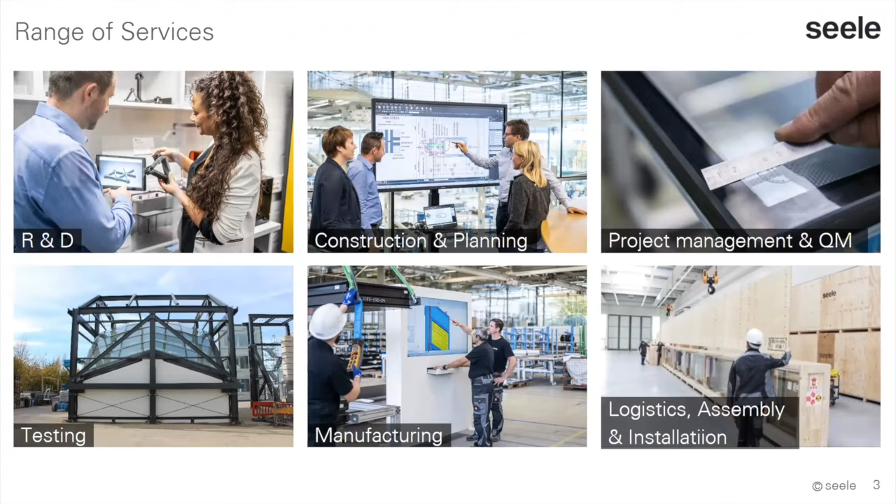So the range of services we provide are majorly research and development, construction and planning, project and quality management, testing, manufacturing, logistics, assembly and installation. Facade technologies we are using are mainly steel and glass constructions, all glass designs, unitized facades and membrane constructions.

Highlight projects here to share with you so you get a little bit of better idea of what kind of projects we are focusing on. To the top left, we have Chadstone, a shopping mall in Melbourne, which is a grid shell glass roof, steel glass roof. Top center, you can see King's Cross in London. On the right-hand side, it is Tech Bridge in Toronto.

On the left middle, it is a store in Bangkok. In the center middle, we have the Strasbourg railway station. On the right-hand side, we have Icon Siam in Bangkok as well. Left-hand bottom, it is King Abdulaziz Center for World Culture in Dhahran. In the center bottom, we have the European Central Bank. And on the right-hand side bottom, we have Canary Wharf in London.

So let's talk a bit about glass as a structural element. In general, we have some different types of glass treatment we always need to have in mind when we do glass construction. Let's have a look at what it is. It is float glass, also known as annealed glass, which is a glass that is practically not treated after the float process besides the cutting and such.

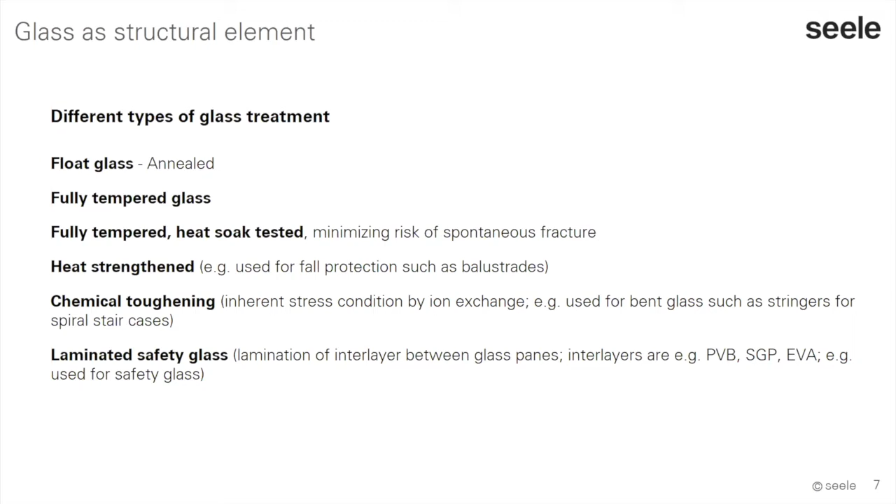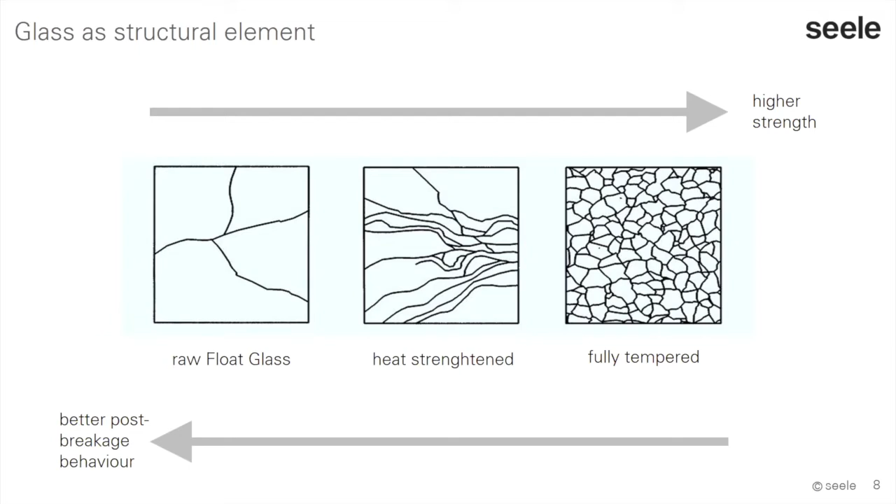And then we have laminated safety glass, where you can laminate all the different glass types as I mentioned above. So to keep in mind, the higher the strength of the glass, the smaller the splinters. The larger the splinters, the better the post-breakage behavior in a laminated glass buildup. This is something we always need to keep in mind when we have a deeper look into the following projects.

So let's start now with the rooftop viewing platform and glass cylinder on the Mahanakhon project in Bangkok. It is the Mahanakhon project, you all know it, it's the highest building in Bangkok. There is a sky tray on top with approximately 60 square meters glazed floor, which cantilevers out of the building. Then we have here 6 glass panels, each 4 meter by 2.17 m, mounted on the primary structure of that frame. Then we have a glass cylinder consisting of an inner and an outer cylinder with 600 square meters of bent glass.

Let's start here with the glass observation platform. As I mentioned, it's 60 square meters. This is what we received in the beginning. We had this visualization here. On the left-hand side, you can see the cylinder again. On the right-hand side, you can see the glass platform.

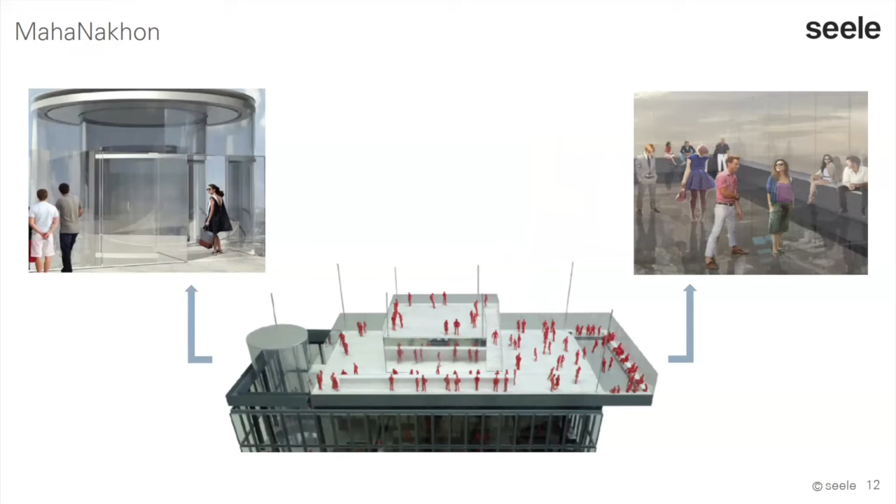So the first discussions we had, there was a design with a steel member below the glass on the joints of the glass. So we were asked whether we could substitute that steel member here with a glass member to make it more transparent. So our idea was that maybe we could even do it without any support below the glass, just making the glass itself strong enough to withstand the live loads there on the roof.

We have to keep in mind here, it's a multi-laminated glass, and with increasing temperature, the structural strength of this glass is decreasing. So how do we determine the structural behavior of that SGP laminated glass panel over temperature?

Besides the outer temperature you have in Bangkok, it's also the direct sun impact that needs to be considered. The direct sun impact leads to effects like transmission, reflection, absorption, and in the end, how much of the sun energy is absorbed by the glass. So how much does the glass heat up by that?

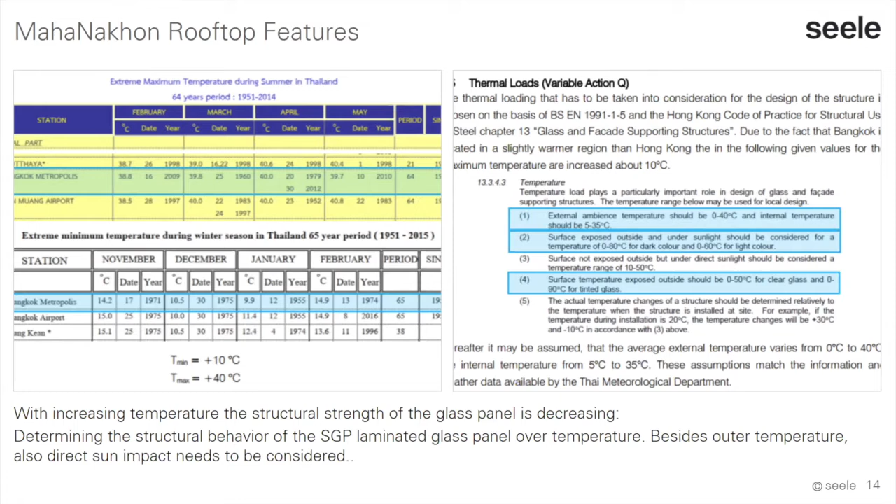In absence of any European or Thai code, we used the Hong Kong code of practice to determine the heat gain due to direct sun impact, always in close consultation with local structural engineers and local authorities.

After all of that was clarified and the calculations were done, we started the practical testing of the glasses we had calculated structurally.

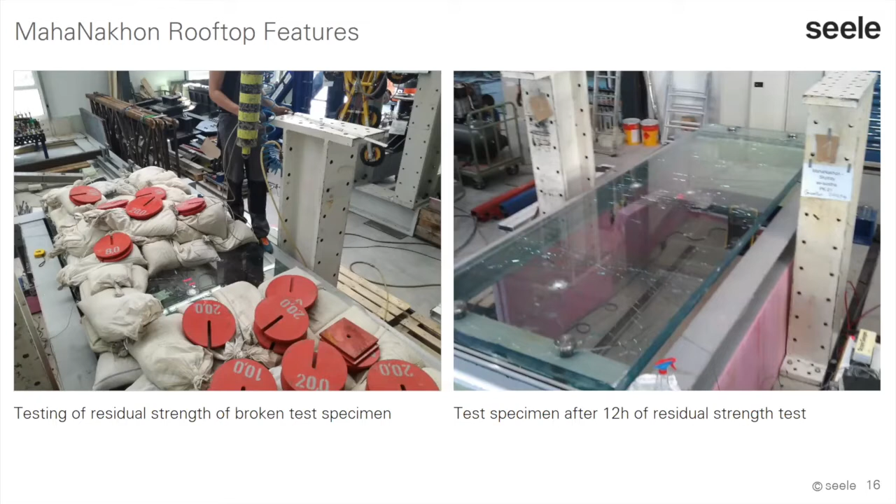We did a permanent loading test. We did the hard body impact testing after the glass broke. With the hard body impact testing, we did a residual strength test of the broken specimen. On the right-hand side, you see the test specimen after 12 hours of the residual strength test.

It's a special point fixing technology which fixes the glass in the bracketry, in order to avoid that in case of a complete glass failure or breakage, the glass could slip out of its bracket and fall down with all the people on it. So this would not happen.

So even if you have a complete failure of the glass, with the glass full of people standing there, it would not slip out or fall down. It's absolutely safe. It would just sag down 2-3 centimeters and then stop, and that's it. All the people can leave the roof safely.

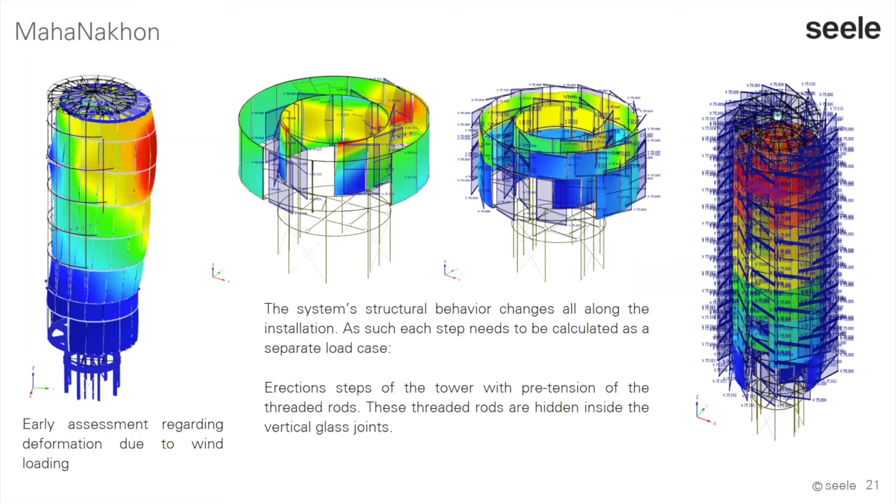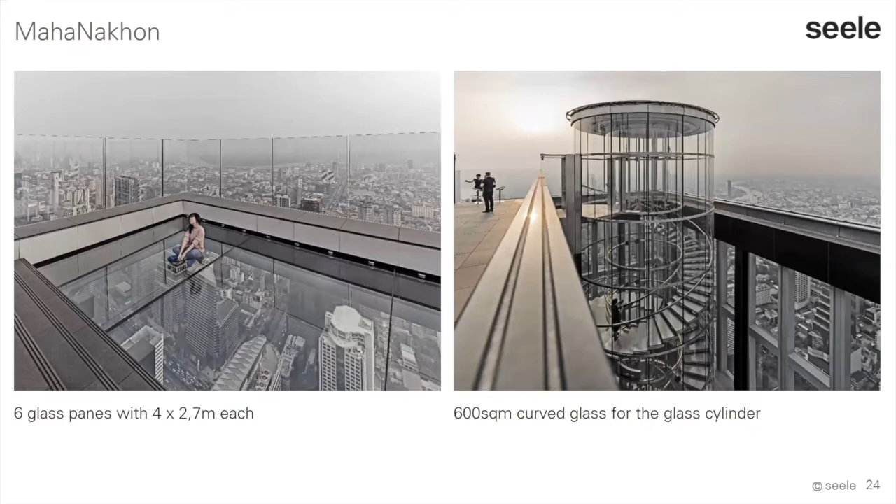So this is the Maha Nakhon rooftop features. Now let's have a quick look at another staircase we did in Bangkok, a staircase over 3 floors at the True Digital Park.

Here you have a view of it after it was finished. Again, we have a central glass cylinder here, and an outer spiral staircase going around, but in this case we have no outer cylinder around it. We have only an outer stringer, a glass stringer, and that glass stringer is suspended from the ceiling.

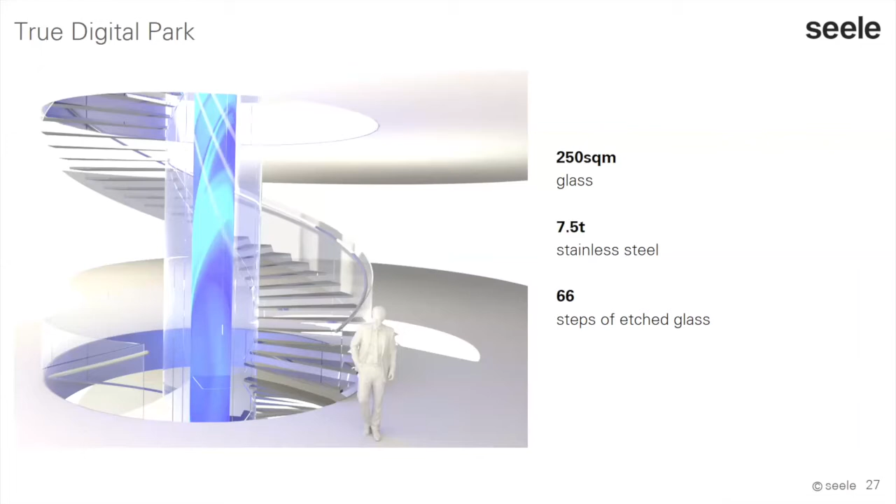So here you have the original architectural concept of it: 250 square meters of glass, 7.5 tons of stainless steel in the construction, and 66 steps of etched glass. The structural calculations here show the deformation of the structure under wind load applied in the X direction.

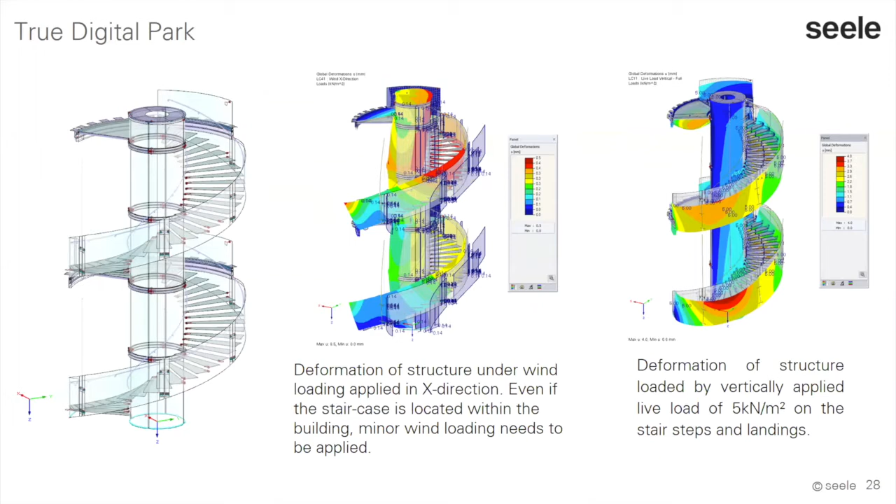Even though it's an inside staircase, you still have to apply internal wind load, which is what we did here, and you can see the result on the glass structure. Then we did the visualizations.

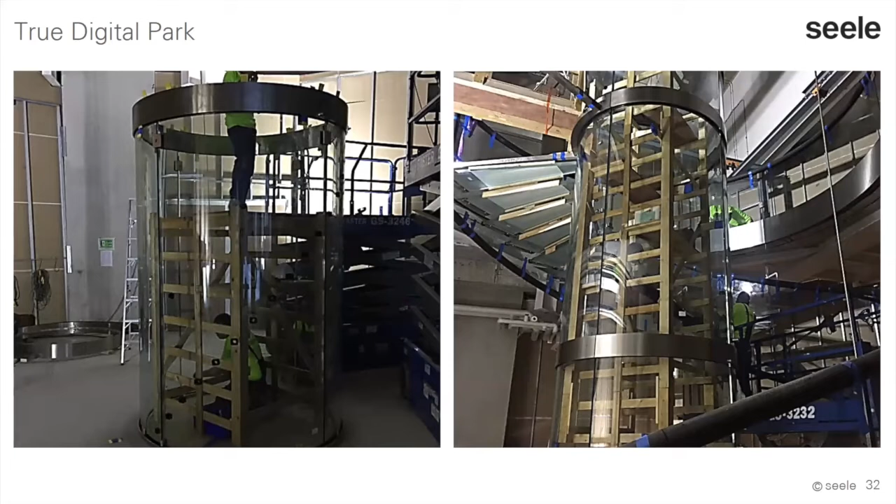And then we come up with the inner cylinder, again with a wooden scaffold inside. Just after we reached the upper floor, we had a glass breakage with the lowest glass in the cylinder. That happens in our business, so we had to change that cylinder. It's also very important that the design ensures glasses can be changed in case of breakage.

Sometimes this is a little bit in conflict with the architectural idea. Here you can see the stainless steel ring above the glass that was broken. The architect's idea is to keep the stainless steel ring as small as possible. We want that too, but we also have to consider the exchange of the glass. So it gets sometimes a bit bigger than the architect originally wanted, but it's still better to have a bigger stainless steel ring here than the alternative.

The alternative would be that you have to build down the whole staircase from top to bottom just to change one glass. That would be the result if you made a smaller stainless steel ring here. So you have to consider all of that while you design it, and that's the final result. Here you see the stainless steel rings and their size, determined by the option of changing glasses in case of breakage without deinstalling the whole central cylinder.

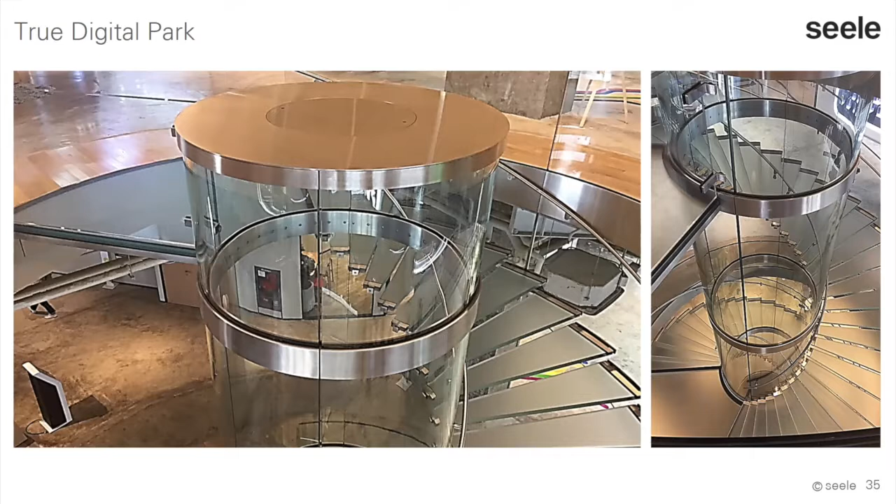So in my humble opinion, this is one of the most exciting staircases we've ever done. Very, very beautiful, in the True Digital Park in Bangkok.

The glass panels are inclined in two directions, to the outside and to the side. The front glasses are in between glass fins and also inclined. We have 333 glass fins, up to 8-fold laminated, and 333 glass front panels with a length of up to 16 meters.

Let's have a look at it. This purple one here is the facade we're talking about now.

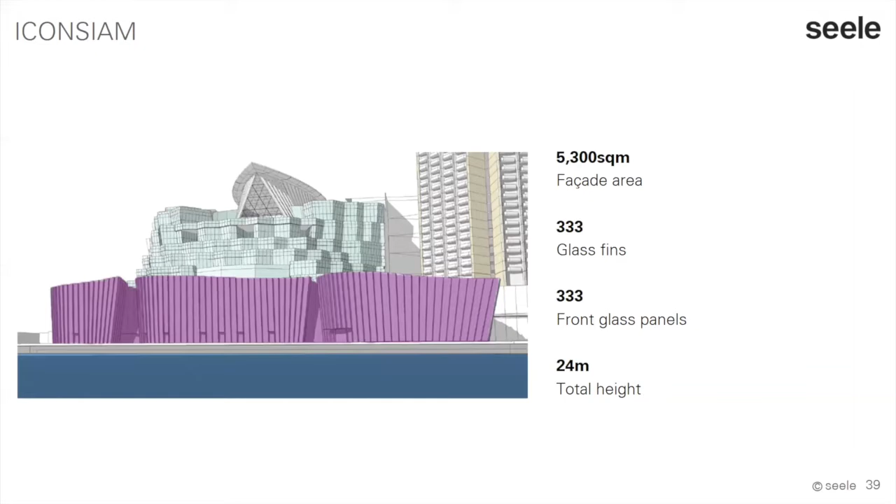This is a picture I first received from Bangkok with the question, can you do it? So I looked at it and thought, let's say yes, maybe. I wrote back, yes, maybe. Two days later I was in Bangkok discussing the project with the client, and a long story started—a real success story with that project. It's one of the most amazing projects.

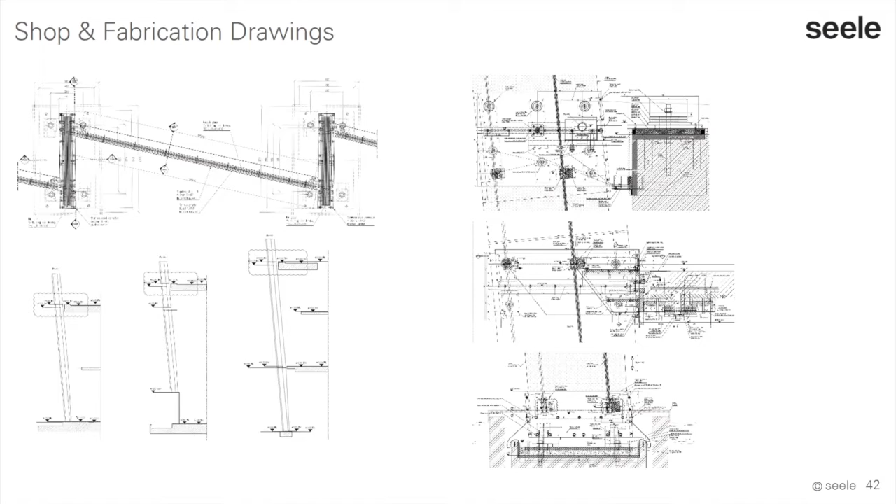Since we have this curved plan of the whole facade, you can imagine an irregularly curved layout, and zero repetition in all the detailing. So for all of the 333 fins, we have a different detail with this complexity, as you see on that picture. Now we go to our glass fabrication.

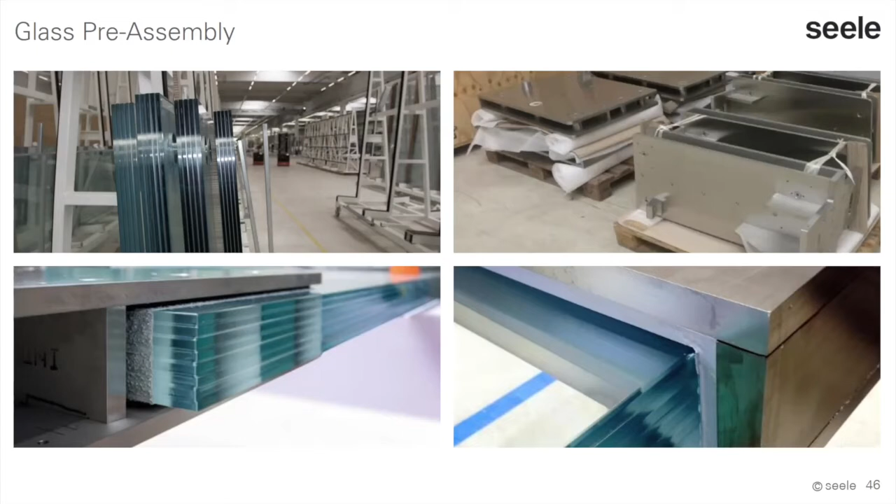The stainless steel shoes come from our in-house steel workshop in the Czech Republic, Seele Pilsen. Then the glass is produced in-house by sedak. The steel shoes are sent to sedak, and within the factory we are fixing them to the glass fins, and this is then how they are shipped.

So here you see them after the pre-assembly, after the stainless steel shoes are fixed to those fins. Then we go into the packing. Here we do our wooden crates for it, and then the fins are loaded into the crates.

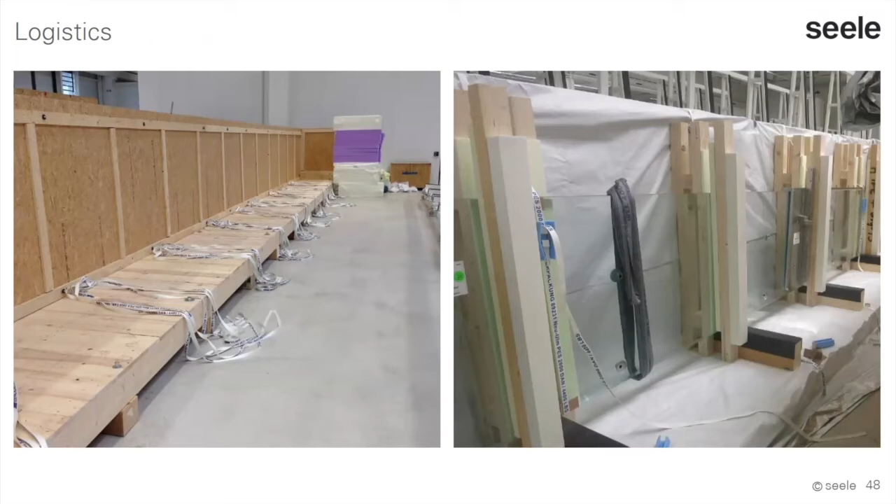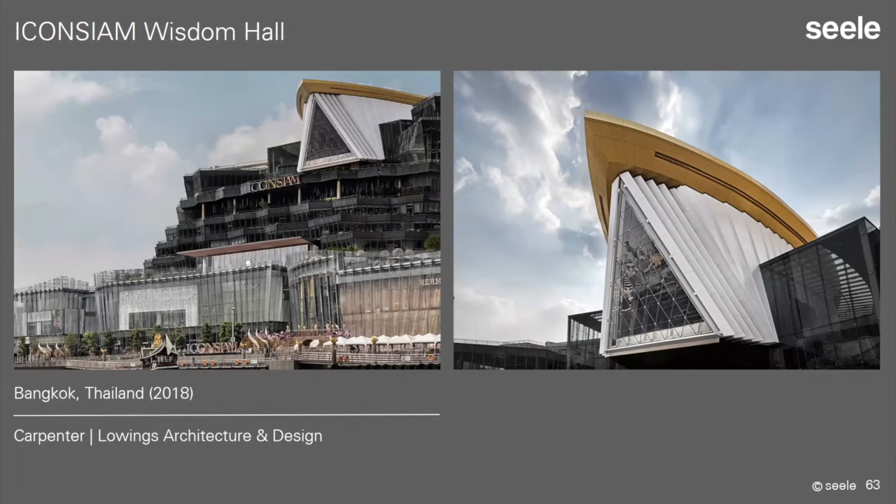So here what we did is an 80-ton structural steelwork. That is the triangular steel frame you can see, consisting of 64 triangular panels of glass held by 14 tensioned steel cables, stainless steel cables, connected at 21 nodes in between.

So we were very limited in lifting material up to the roof - there we could maximum lift 3.5 tons. So to assemble this massive 80-ton heavy steel frame, we had to bring it up in chunks. First, we had to build up a massive scaffold and a working platform on top of the scaffold. Then we were fixing huge hinges against the construction.

And at the tip of the triangle, there is then one single bolt to fix the whole triangle in its final position when it's upright. And we want to see that now here.

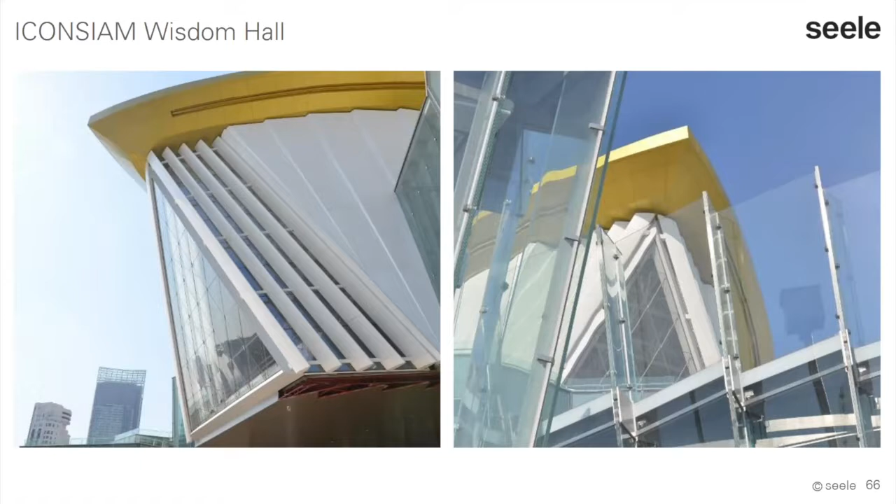That's the final result of the Wisdom Hall, including the glazed cable facade now. And here you see it from inside. You can also see the point fixings that are holding the triangular glasses are pretty small.

So this is now something that Seele is very well known for, that we are able to minimize all structural elements in such facades. And in order to be able to do so, you really need to know about glass - you know how it behaves, and you know how you can use it in its best efficiency structurally.

Another glass facade we did in Asia, that one in Hong Kong. Let's have a quick look into that. That is the K11 Musea.

It's the design, production and assembly of a 2,300 square meter glass tube facade. It consists of laminated safety glass tubes, 69 of those with CCF technology, which is closed cavity facade technology, with stainless steel cladding at the ends of the tubes. We have totally 307 of those glass tubes, and 69 with the CCF technology.

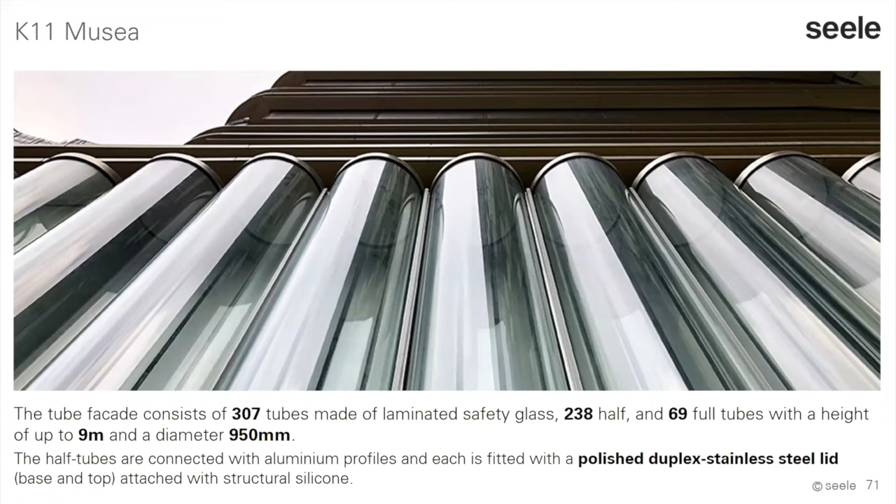So for this facade, we have tubes up to 9 meters high and 950 millimeter diameter. The half tubes are connected with aluminum profiles, and each is fitted with a polished duplex stainless steel lid at the base and top, sealed with structural silicone there.

For the fully closed tubes, we use this closed cavity facade technology, where we pump in dry and cleaned air. It needs to be clean, of course, so there's no dirt inside those tubes, because you don't want to go inside to clean it. Secondly, you need to make sure there's no condensation inside the tubes. And the risk of breakage of the tubes must be absolutely avoided, since they are quite expensive. The damage of a sealing of the tube also needs to be avoided.

So we have to make sure the fixing to the building is created in a way that it can take all the movements of the building, especially all the lateral movements. That led to a very complex top and bottom detail, to make it movable and flexible enough to go along with the building's movements.

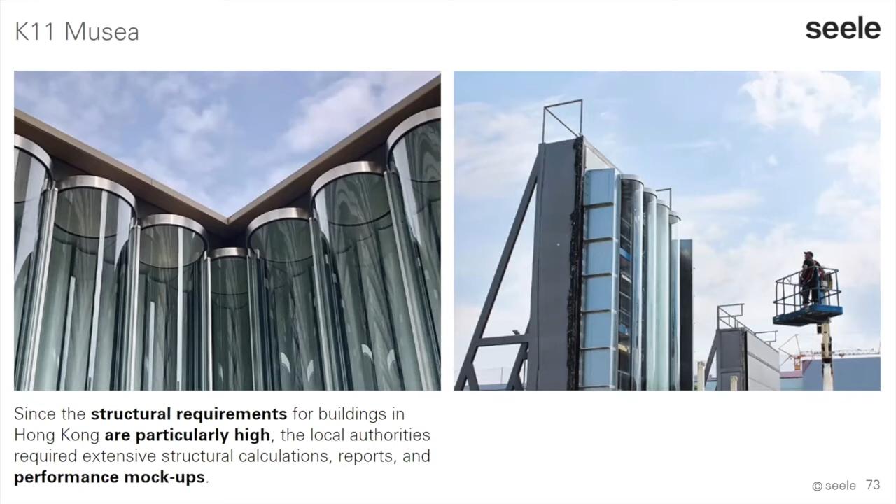Since the structural requirements for buildings in Hong Kong are particularly high, the local authorities also required extensive testing and structural calculations, which we did in Gersthofen, our headquarters in Germany. Here you see the test build-up.

So thank you for that. Now let's have a quick look into the installation of the ICONSIAM, or the making of ICONSIAM. I have a short film prepared, so I will run it now.

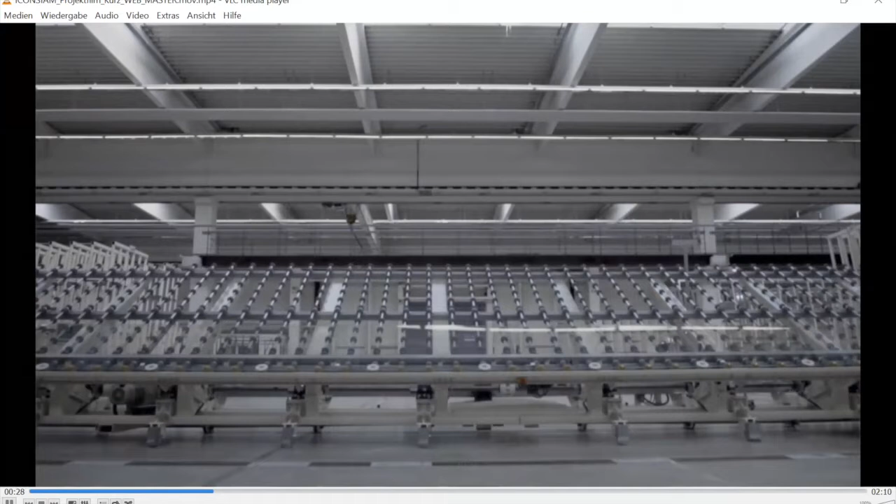The glass processing, engineering of the steel brackets. Here you see one of the brackets, it's massive. The fixing of the stainless steel shoes.

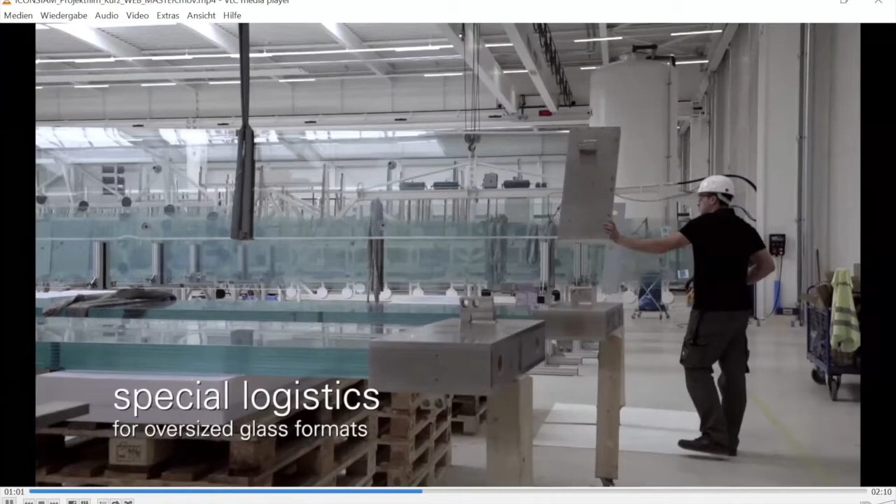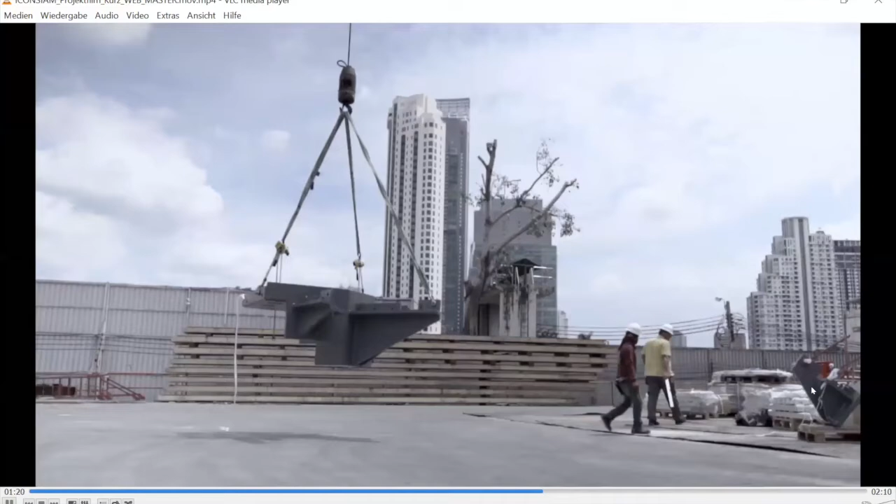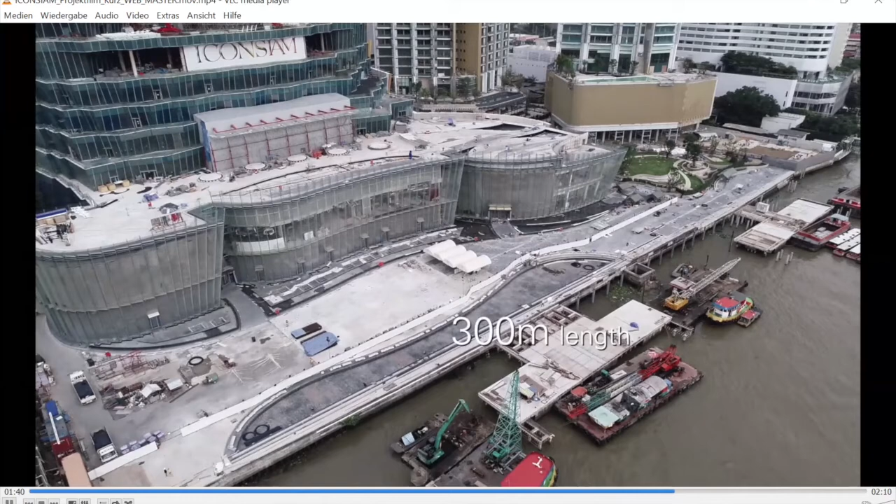Going on its journey to Bangkok. Arrival in Bangkok. Bracket again. In the background, you see the Mahanakhon, which we did at the same time. Here you see the super-sized glass fins, up to 20 meters high. And the final product, view from inside and from outside.

So thank you very much for your attention, and I give back to Mr. Renato. Thank you, Andreas, for this great presentation. Really impressive, it was a pleasure listening to all the great projects and seeing them. What I particularly liked is you could clearly see the elements of beauty, of engineering, of science, and of all the teamwork. Congratulations, thank you very much. It was nice to see your presentation. All right, thank you very much again.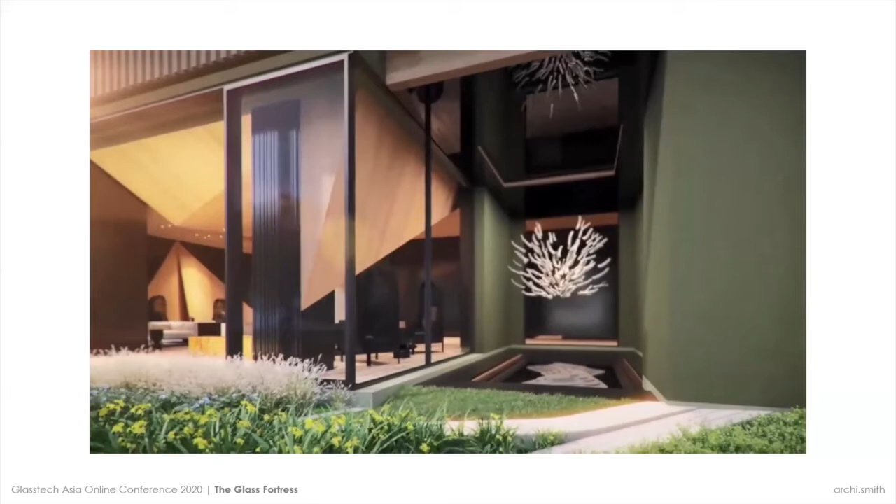There's a fox roaming around in the forest, and the fox discovered two magical trees turning into a building. You never know whether it's the fox's imagination or yours. The building on various levels simulates conditions of trees from the root to the canopy, turning them into an animal sanctuary. We use the same concept throughout for architectural, interior, and landscape designs.

Now, from that video, this is the condominium that we are responsible for the architectural design. Here, one of the strong selling points is a large communal green space of almost 13,000 square meters in front of the building.

This is quite rare for new condominium developments nowadays. The architectural design concept is a manifestation of gigantic magical trees rising from the green area below. If you squint your eyes a little bit, you will see a tree pattern on the facade.

There were some constraints that prohibited us from building the sale gallery on the main site. It had to be off-site, but luckily not so far away. Our design goal was then set that we wanted to lift this green space up, pack it along with us, and put it on the new site to simulate the idea of living with nature.

We had so many issues with the surroundings of the new site, not only the noise pollution from the heavy traffic in front, but also some other visual pollutions, such as the construction of the SkyTrain system, untidy footpath, messy wires, advertisement banners, and so on. The question we had was how to create something magical out of this.

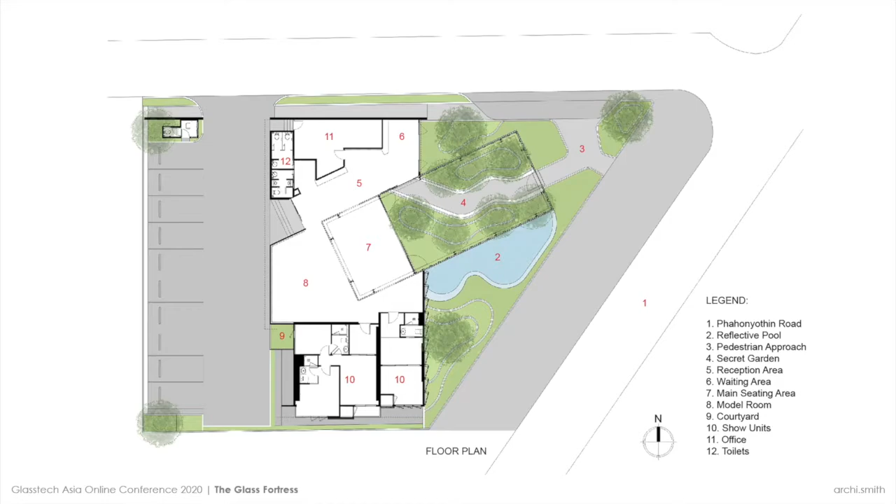There are two types of garden here. The external one is to create the overall atmosphere of the project, and the one in the courtyard, as I mentioned earlier, is to simulate the idea of living with nature of the main development.

The building's orientation is intentionally angled away from the road alignment to create distinction. The solution provides not only a visual break on a dense urban fabric, but also greenery for the passerby. As you can see from the picture, this is the only green area by the roadside of this neighborhood.

The sale gallery sets aside some of its land along the street to become a pocket park for the public, and of course, for the people who are stuck in the traffic jam too. During peak hours, I can probably present the whole slides I have today to the guys inside the car there, because sometimes you can be stuck at the same spot for 20 minutes. And looking at the green patch during traffic jam is definitely not a bad idea.

The glass blocks used for the project are rectangular as opposed to those conventional square-shaped type. They also have extended edges or wings to cover most of the grouting, reducing the width to 2 millimeters instead of 10 millimeters as usual. This special detail reduces the visual perception of joints, thus creating a continuous all-glass effect to the walls. In total, we used about 20,000 glass blocks to build this project.

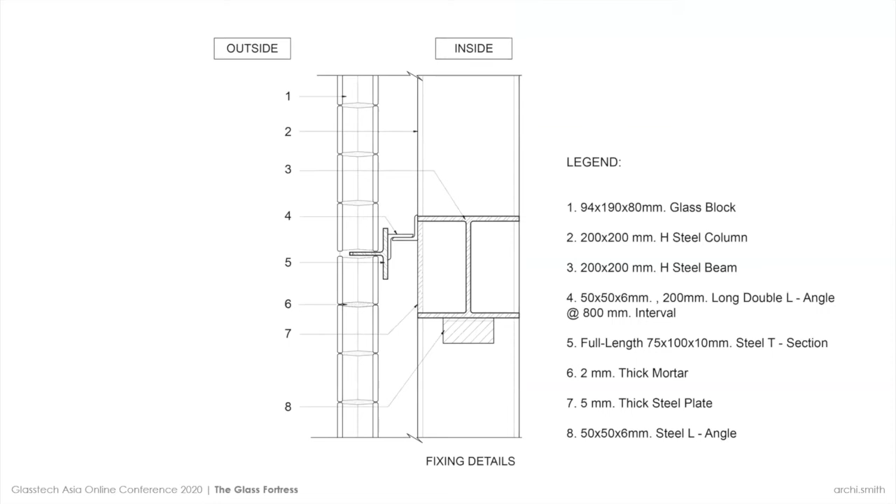Another interesting idea, and probably one of the most difficult tasks of this project, is the fact that the glass blocks do not form just a straight or L-shaped wall, but a complete loop. This requires advanced planning and great precision since the tight project timeframe did not allow us to make many mistakes.

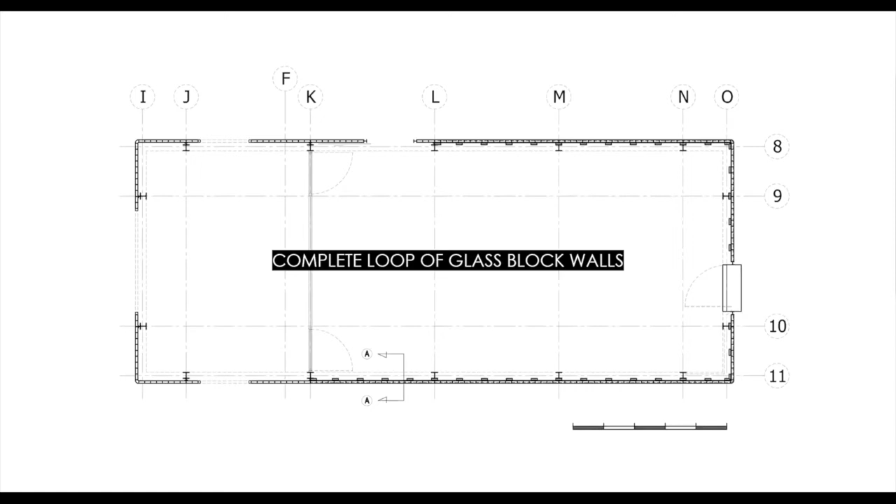The special corner block, which is double the height of a regular block, helps to complete the looping.

The other interesting part is that the glass block wall is a shelter of all conditions. It's a separator of exterior to interior, interior to interior, and exterior to exterior spaces, and the effects of these various types of separation are different.

In terms of environmental design, due to the nature of the glass block comprising 2 layers of glass, theoretically it is similar to double glazing, so it cuts down traffic noise pollution. The air gap inside can also provide thermal resistance, keeping the building cool.

The repetition of glass blocks' horizontal mortar joints helps reduce light transmission from the higher summer sun. Rectangular glass block will also cut down light transmission by double as compared to the conventional square-shaped type.

Natural ventilation in the garden is encouraged by the stack effect, caused by lifting the base of the glass block enclosure up to allow movement of cool air to get inside and hot air to rise out through the opening on top. In addition, a water misting system is installed to control the temperature inside the courtyard on sunny days.

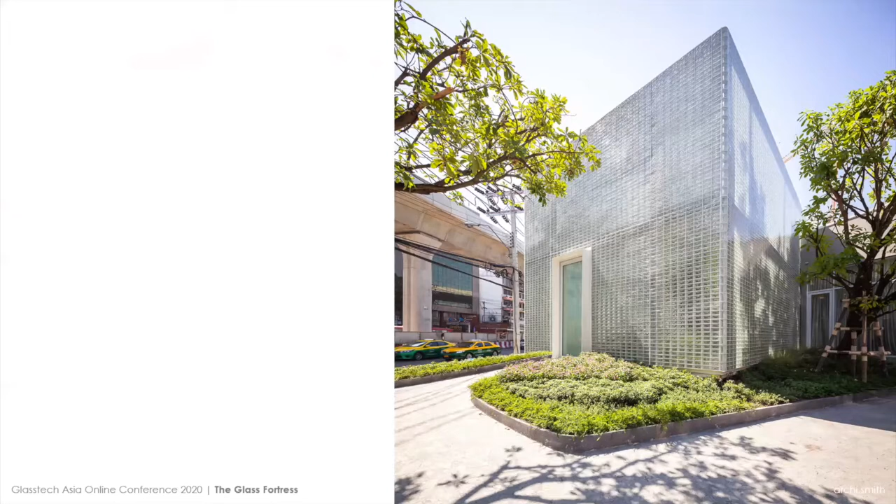Through the glass blocks, the visibility of tree silhouettes depends on the conditions of daylight. On one side of the facade, you get the dazzling effect of sunlight, while on the other end, you get a light and shadow play. The facade changes its look perpetually, following the condition of sunlight and the shifting shadows of trees.

The mesmerizing look of the building is carefully crafted by the combination of glass blocks, clear glass, and mirror. These together create different depths of reflection piling up on top of each other, giving the seamless continuation of interior and exterior spaces.

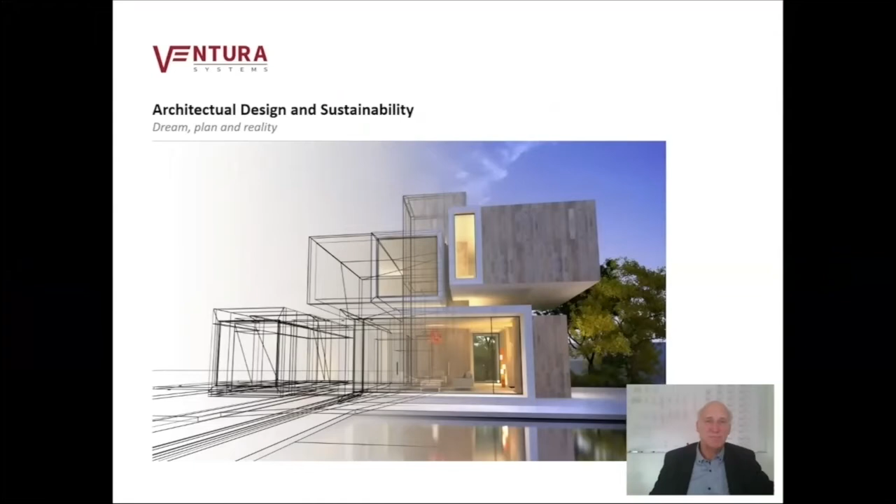Good day, ladies and gentlemen. Today I want to introduce you into the fascinating world of minimalistic aluminium systems, including the city window concept 4.0 and green building excellence. Architectural design and sustainability are part of our minimalistic system world. We follow the sequence: dream, plan, and reality.

Shortly about us, we are a German company. We are specialists in minimalistic aluminium systems. We are focused on minimalistic windows and on minimalistic sliders. Our function is to work as an aluminium system house.

So what are the suitable materials for minimalistic products? Wood and UPVC are not suitable to make minimalistic sliders out of these materials. We need to have steel or aluminium, and we are talking today about aluminium systems.

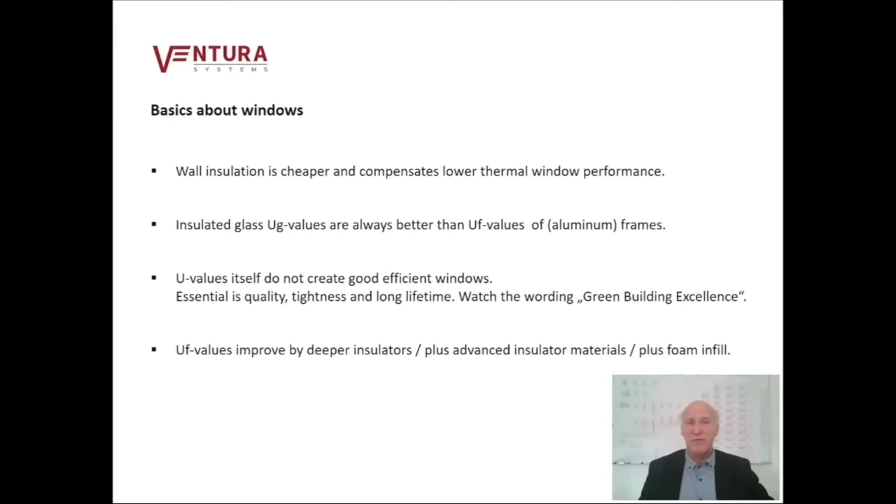We have here three more basics to tell you. UF value gets better by enlarged sightlines. Triple glass, three glass itself does not make a good window, and a passive house window must not be a good window.

This chart is important, watch. Here we see the influence of insulator depth on UF values of window profiles. You see that the curves are declining, and you see the figures 1, 2, 3, 4 being on this decreasing curve. For each of these, we have a section drawing in the next chart.

But important is to watch the red cross, which shows the UF performance of the Ventura V70 profile system. It has a UF value of down to 1.3, which means that everything left of the red cross can easily be replaced by this disruptive profile performance. Everything right of the red cross is very difficult to gain their energy.

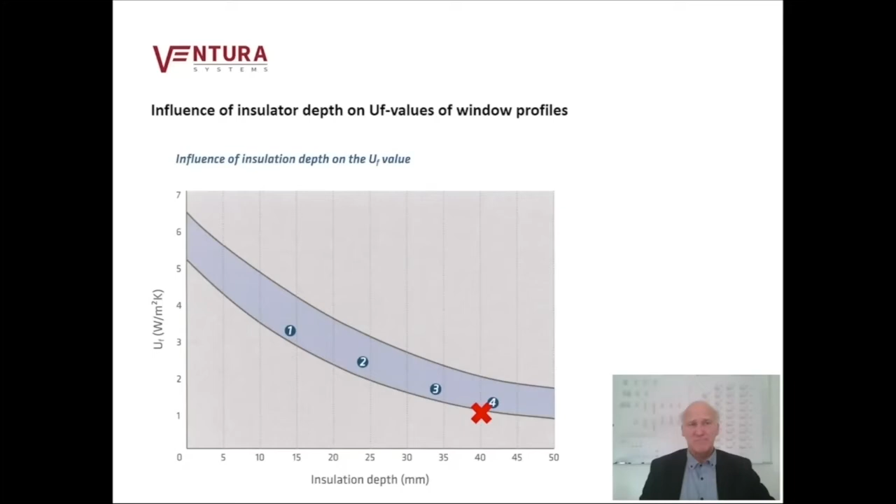Here we see now the four section drawings corresponding to the chart we have seen before. The chart shows the influence of insulation bars and gaskets on U values.

It is clear that with deeper insulators, the frame depth is increasing and the UF value is getting better. Here from the left side, starting with UF values of 3.3 down to 1.5 on the right side with figure number 4.

With figure number 4, we see 42 millimeter insulator depths. We see there already SN3 triple glazed used. We see foam insulators, and we see a rebate gasket infill. These are all measures to improve U values. Important is that the Ventura V70 series with only 70 millimeter frame depth creates a UF value of 1.3, which

Facts and potentials. As a resume out of the figures we have seen before, we have a large potential of easy energy savings by substitution of 50 to 65 millimeter frame depths. These insulated series already lose significant market shares, even in warm climates, and strong efforts are needed to improve UF values below 1.3, in direction to 1.0, which is done with only 34 millimeter depth of insulators.

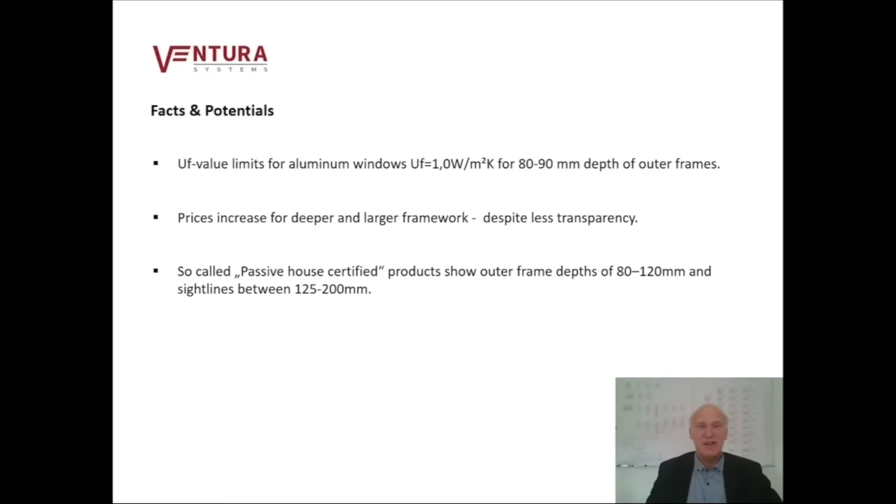Coming next to green building excellence. Ventura coined the term green building excellence as a new ecological environmental standard for the building industry. There are three facts implemented in green building excellence. First, the low use of materials in minimalistic systems which conserve natural resources. Second, excellent insulation minimizes energy consumption down to passive house level. And third, outstanding quality ensures a long lifetime.

Coming next to the mega trend automation. Here, Ventura plays a role with the city window concept 4.0. Ventura combines innovative products with intelligent building and technology to create green building excellence. What is this in detail? That is, first, surveillance of opening systems. Second, smart home control via climate parameters. Third, smoke heat extraction functions. And finally, shading via EC glasses and according to 5G standard glass.

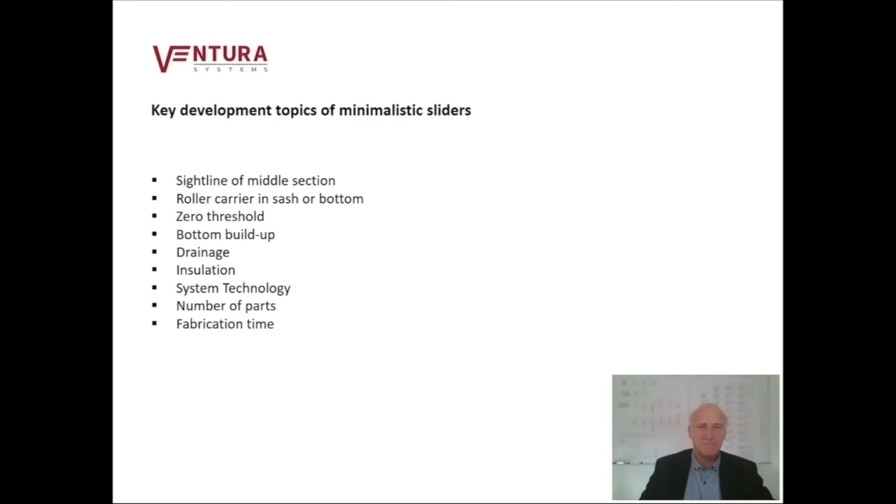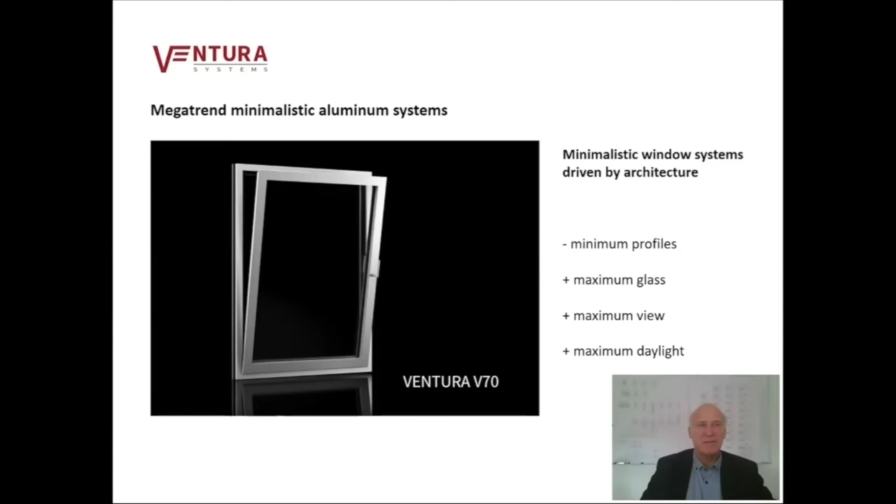Here we see the minimalistic window system, Ventura V70. We have here minimum profiles, maximum glass, maximum view, and maximum daylight impact. Showing you in this picture the highlights of the Ventura V70. We have the section drawings, the vertical section drawings on the left side, and in the middle of the picture you see double glass and triple glass usage.

We have only 95 millimeter sightline. We have a 70 millimeter system, short and strong, with 34 millimeter insulation bars. UF values 1.3 to 1.4, and two glasses can be used, double or triple glass. We have no foam insulators which are harmful to the human body, and we have an extreme tight system. Now we make a comparison.

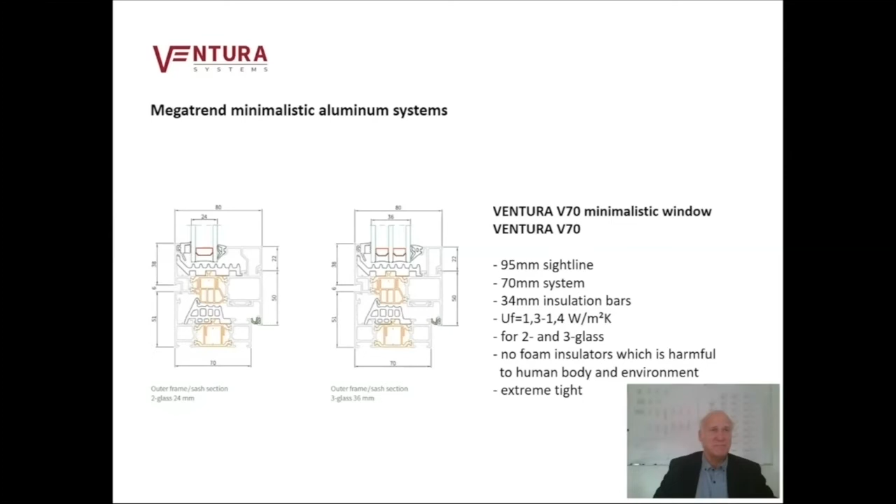What is the performance of minimalistic aluminum systems? If you take the Ventura minimalistic products shown before, you can reach UW values of about 1.20 with double glass and about 0.80 or below with triple glass. For exact data, watch the Ventura website. It is evident that minimalistic systems win by smaller frame parts and larger glass partitions.

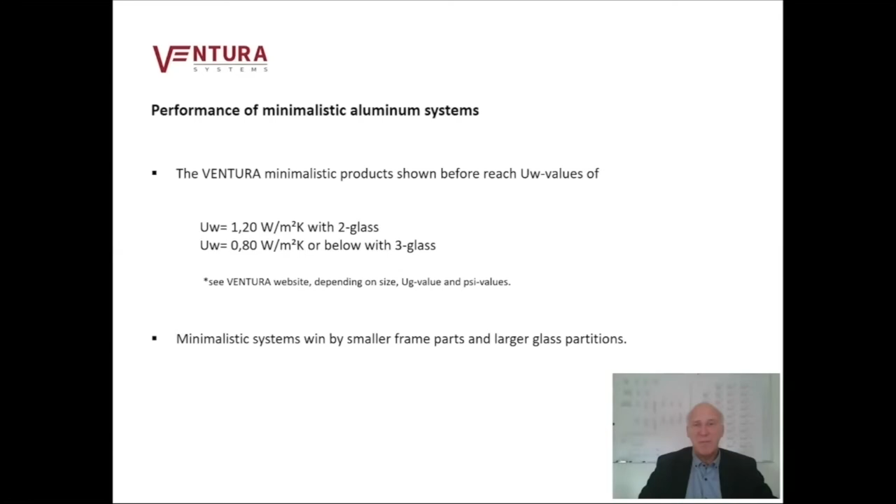Concerning the performance of minimalistic aluminum systems, according to our experience, minimalistic systems require extensive technical know-how, which is limited to only a few specialized companies. Secondly, developing a disruptive 70mm window series is more challenging than improving conventional series from 65 to 75 and then up to 90mm series.

There's a clear interaction of two megatrends. On one side, the minimalistic aluminum systems, and on the other side, sustainability — with energy savings, low U values, low material use, long lifetime by quality, and recyclable material. High performance minimalistic products show green building excellence.

Glass industry and minimalistic series: the glass U value performance powers and promotes minimalistic series.

Minimalistic aluminum windows will have a reasonable frame depth of the outer profile from 70 to 80mm. That is a limit given for the future. Tempered glass, 2 panes with a weight of about 40 kg per square meter, are reasonable for minimalistic sliders. We can expect UW values of good systems in the range of 1.2, which is quite reasonable, and the weight of the systems enables manual opening.

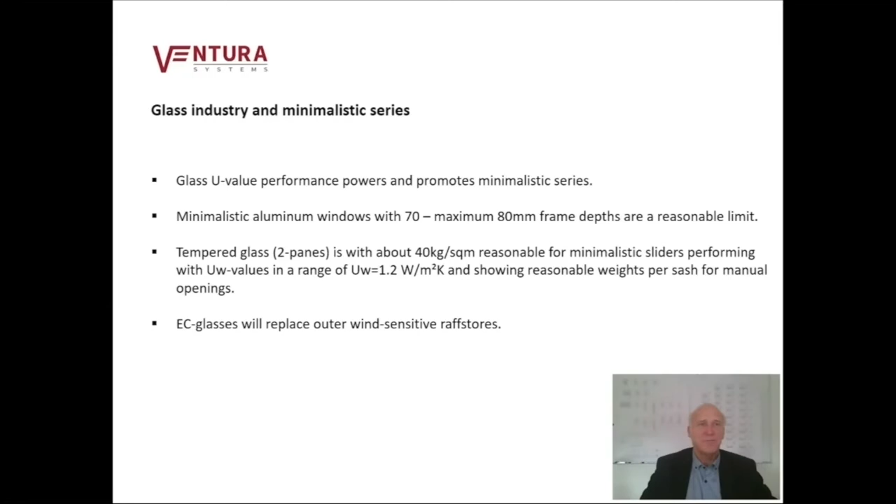The next point is quite a revolution: we believe that EC glasses will replace outer wind-sensitive raffstores on a large scale over the next 10 years. Future outlook for minimalistic aluminum systems: this is the perfect synthesis of design, function, quality, energy savings, and long lifetime. Minimalistic systems, affordable for a large number of clients — that will be the future.

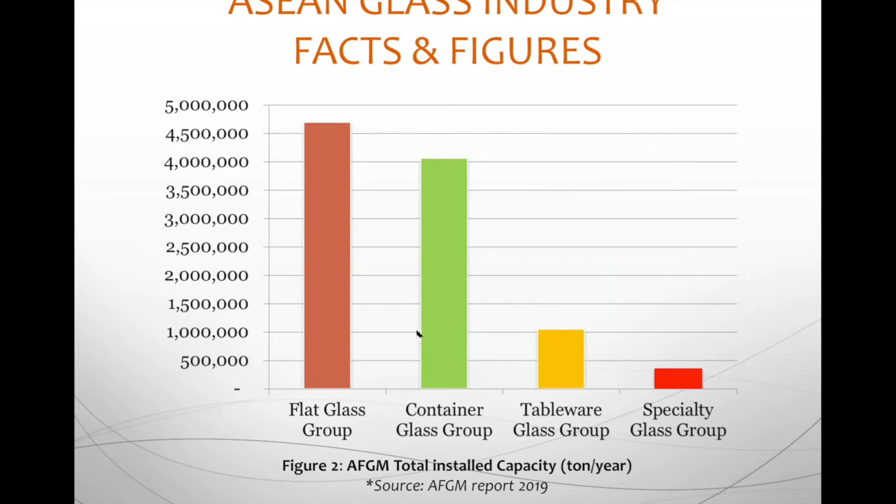Here are the ASEAN manufacturers' factors. Among these, we will see the flat glass sector takes about 40% of the whole manufacturing sector of ASEAN countries. And figure 2 shows the total installed capacity in tons per year, in which the flat glass sector has 4.5 million tons per year. So the capacity is very huge.

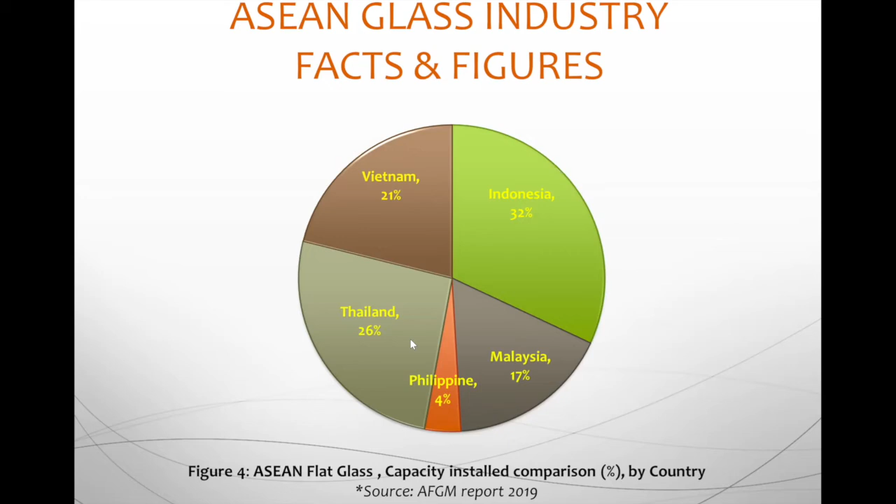And this figure shows the installed capacity comparison by country between Vietnam, Indonesia, Malaysia, Philippines, and Thailand. Here you can see Vietnam takes 21%, Indonesia 32%, Malaysia 17%, Philippines only 4%, and Thailand 26% of the flat glass capacity.

So what is the effect from COVID-19 to ASEAN glass industries, especially in flat glass. As you see, the nationwide lockdown made an impact on the glass industry. Even the energy price was reduced in the short term, but it's still a major obstacle for the industry, while the demand for flat glass has not recovered.

Some of our glass manufacturers have had to shut down for repair or maintenance. The impact on flat glass demand includes not only a slowdown in building construction activity, but also production shutdowns triggered by the pandemic and supply chain disruption during the initial strict enforcement by the government.

The demand for OEM motor vehicle and solar energy markets has dropped significantly due to slow market sentiment. Indonesia's flat glass market was good last year, supported by property and automotive industries. But this year, due to the pandemic and strong competition from overseas product produced in Malaysia and China, the market has been slow.

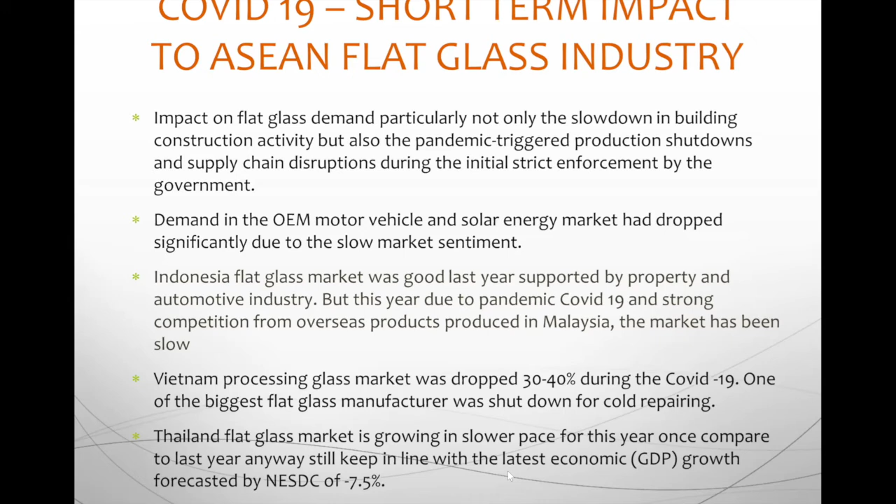Thailand's flat glass market is growing at a slower pace this year compared to last year, but it's still in line with the latest economic GDP growth forecast by NESDC of minus 7.5%.

So I would like to show you some key points on why we see opportunity in the new normal time. In ASEAN and Asia region, the flat glass market is expected to reach a CAGR of over 4% over the forecast period. The growing demand for electronic displays and increasing demand from the construction industry are driving the market.

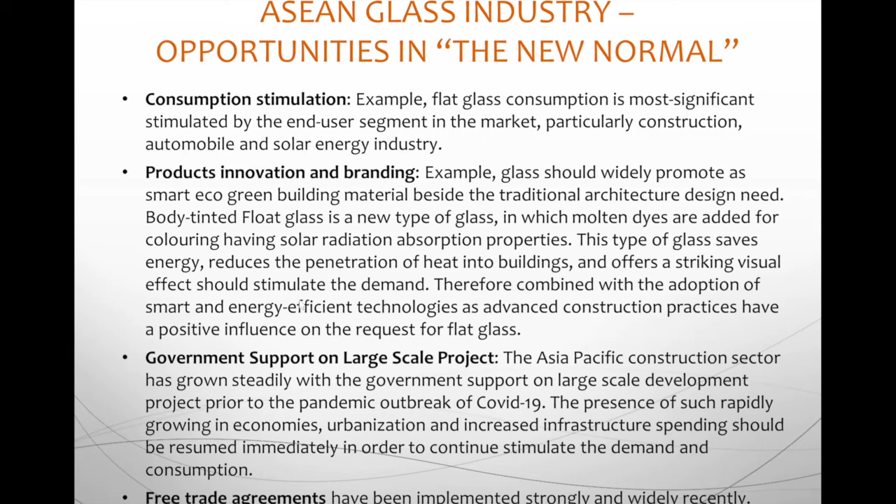And last but not least, the free trade agreement has been implemented strongly and widely recently. In my last word of this presentation, I would like to say thank you for the last presentation of the architect. We believe that the flat glass will continuously develop despite the pandemic, and we will have a lot of opportunity to develop in the new normal. Thank you for your attention, and stay strong together. Thank you.

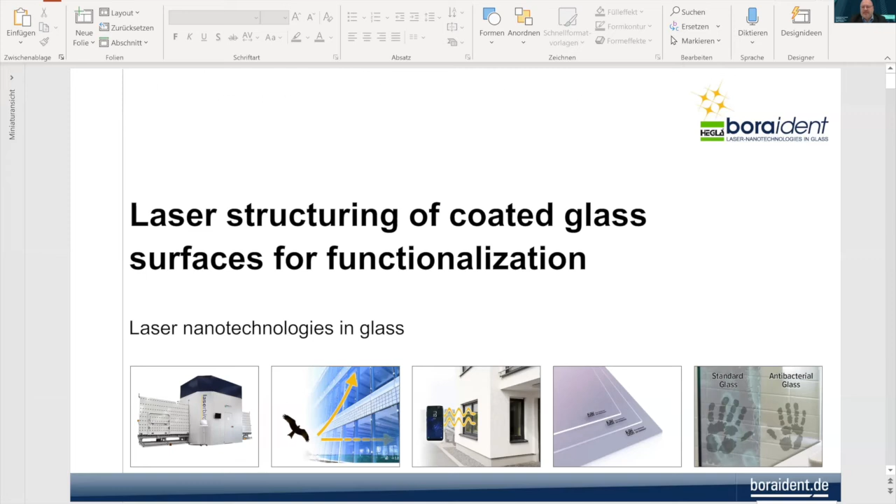Thank you for the introduction. Hello and welcome, my name is Thomas Rainer. I'm the head of operation and development of Hegla Boraident. For 20 years, my passion has been the interaction of laser radiation with the material glass itself. Thank you for joining my webinar, Laser Structuring of Coated Glass Surfaces for Functionalization. I will go through this lecture. At first, I will say some words about the idea behind this topic. Then I will explain some examples of functionalization of glass surfaces, say some words about technology, and then summarize.

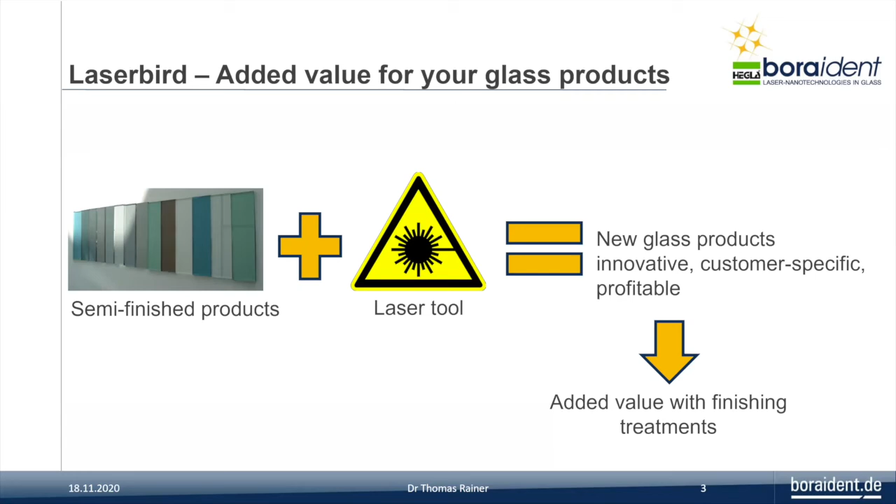Okay, the idea behind it. We saw there are a lot of semi-finished products available in the market, that means especially coated glasses. And if we use the laser as a tool, like a CNC machine with different drillers, it is possible to create new function in these coatings and then create new glass products, innovative, customized, and profitable. And so we have the possibility to add additional value to the final finished product. And to do so, then we need a machine.

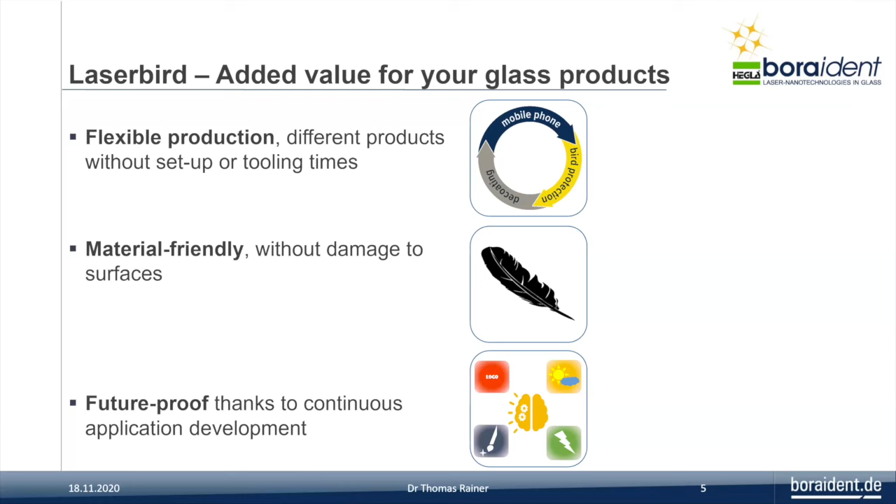And if we use lasers to modify the coating, then we have a very material-friendly technology. That means we have no stresses or cracks inside the glass surface itself. We modify only the coating. And the system is an open system, that means for the future, we can add new technologies as well as the hardware for these technologies inside this Laserbird system.

So let me tell you about examples for this functionalization. If we handle such a machine, it's very easy to do. It's like using your smartphone. You have different applications inside the machine, and the operator has only to choose the different apps, and then he can produce different products like bird-friendly glass or cell phone-friendly glass. And I will explain a little bit more about some applications possible to do with such a machine.

In our days, communication is very, very important. There's one problem if we are sitting in a train or in a building: the windows always have a heat damping function, and this is caused by a layer system on one side of the glass panes, with minimum one metallic layer inside these coatings. The metallic layer is very good for the heat damping function, but not good for communication—it blocks the radiation of the cell phones. What we do to solve this problem is we make a magic pattern. You can see it here, very fine lines to remove the coating.

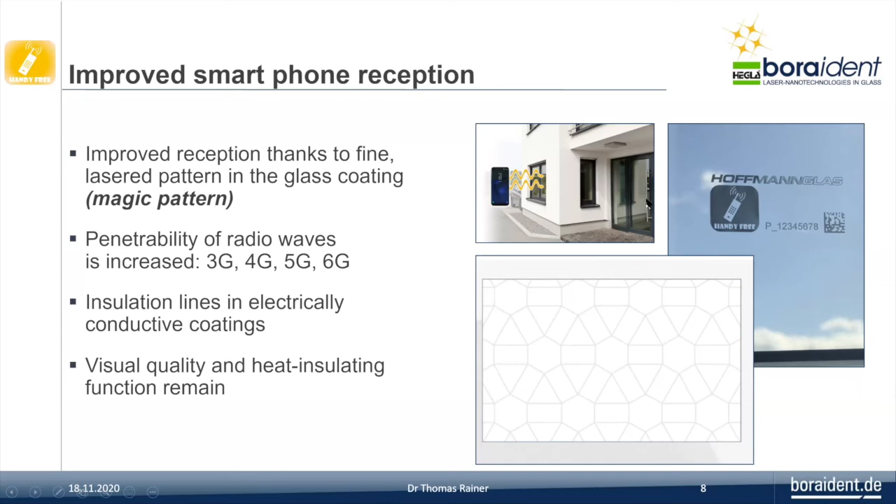It's a very important thing, and it's only possible to do this with the laser as a tool. The next example I will show you is a very huge and global problem.

Millions of birds were killed at glass facades. The problem is that the birds think they can fly through, or they see a reflection of a tree in the glass facade, and then hit the glass, and in most cases they die.

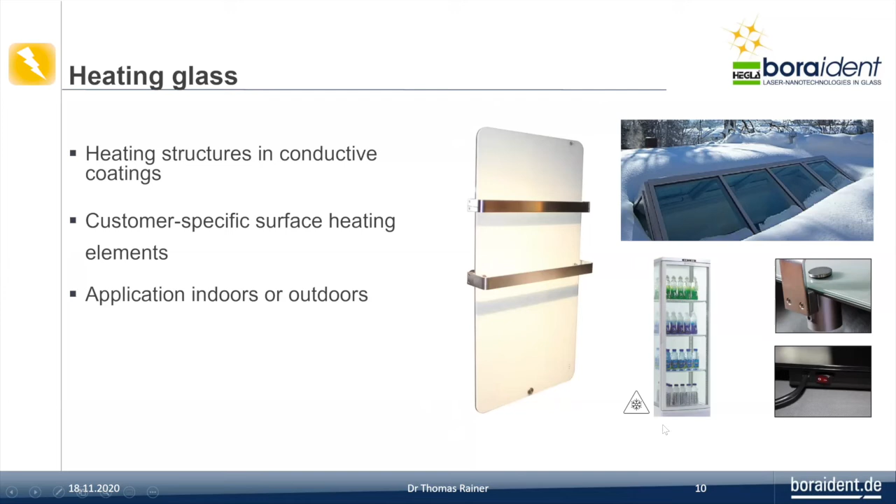If you have an overhead glazing, you can reduce the amount and weight of snow in wintertime if you melt the snow by heating up this window. The third example is a refrigerator. There is a fog-up effect, and you can avoid this fog-up effect if you heat up the glass pane.

The fourth example is for the field of architectural glass. Sometimes we have facades with so-called structural glazing, using a so-called step IGU unit. That means one pane of this step IGU unit is larger, and there's a need to remove the low-E or sun protective coating at the edge in a wide range, 50 millimeters up to 100 or 200 millimeters, to bring ceramic color on it and clamp the whole glass product in the facade at this region.

This removal of the low-E or sun protective coating can easily be done with mechanical tools, but the disadvantage is that you can see stripes from these tools in this region, which is not a fine, good aesthetic result. With the laser, it's possible to remove this low-E or sun protective coating in a very fine way with high optical quality. The only disadvantage is that it takes a little longer compared to mechanical tools, but it's a very aesthetic product, and it saves delivery time at the end of the day, so you are very flexible if you produce structural glazing.

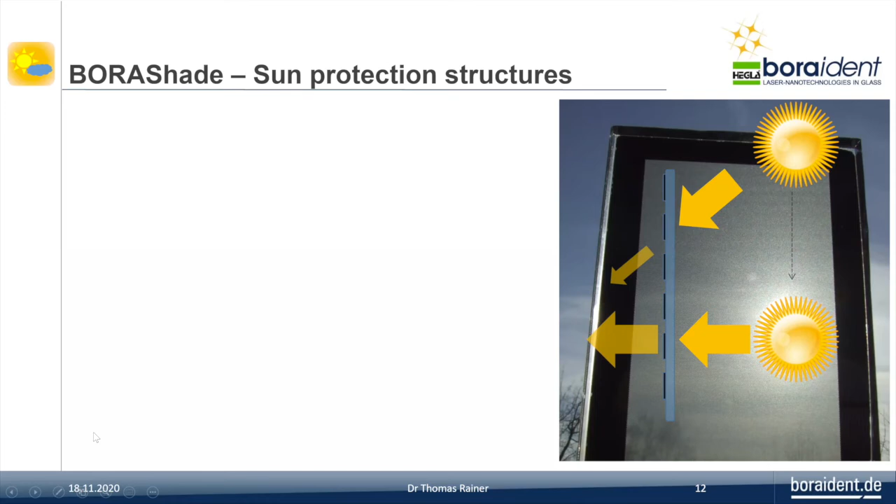Then you have an effect, a shadowing effect, which depends on the position of the sun. I can show you this in this short movie here. You see the effect of the shadowing; it depends on the angle of the illumination. It's a very good example of combining laser technologies with traditional glass processing technologies.

So all these examples I showed you are examples to remove or modify the coating on the glass surface itself. The next examples involve bringing material to uncoated glasses. It is possible to print with the laser material onto the glass surface itself. It's like the technology of an old typewriting machine: you use material coated with a special coating and transfer it with the laser as a hammer, like in that old typewriting machine, to put the coating onto the glass surface itself.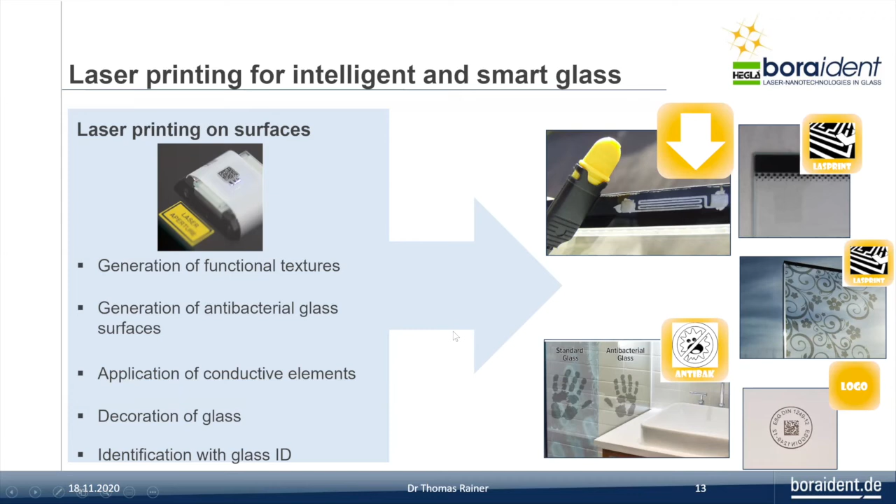If you have a conductive coating, you can print alarm circuits, and with metallic films, you can decorate the coating. At the final end, if you have silver ions, for example, you can bring antibacterial function to the glass surface itself. These are examples of what we can do with the laser: remove coating, add new material to the glass surface, and create new functions.

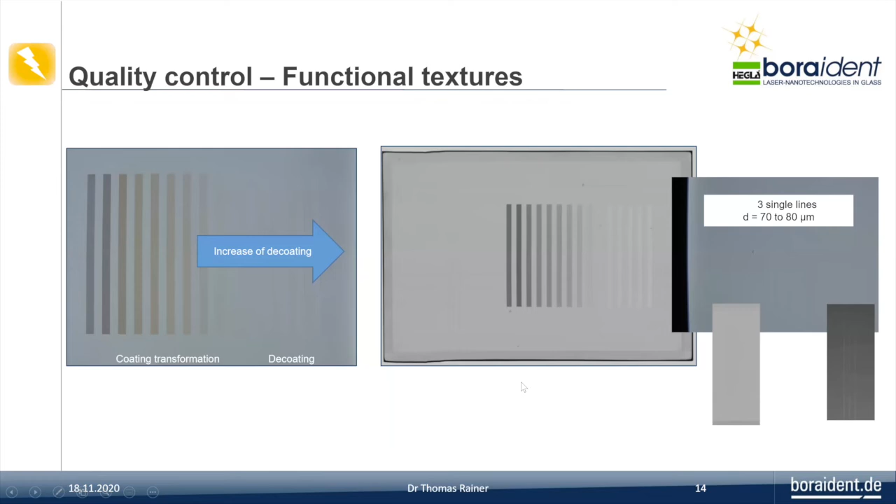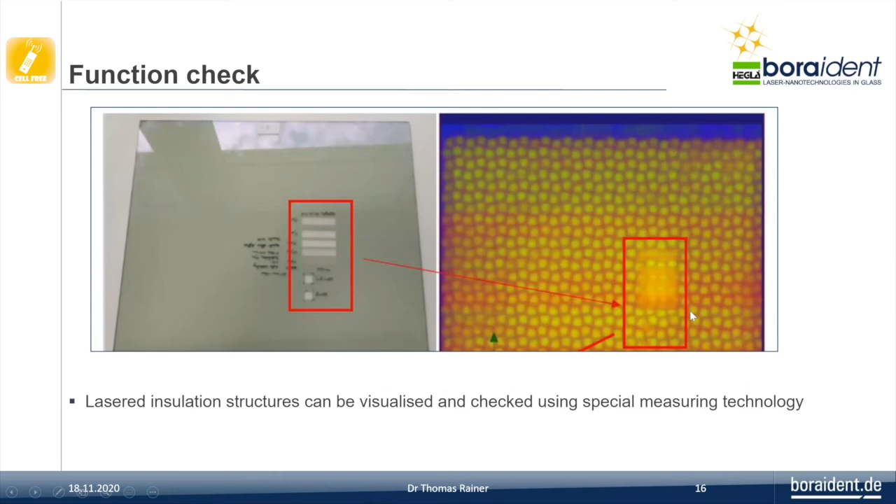The last example is a function check. If you have a conductive coating, here is an example with a coated glass surface. The glass is fully patterned, and you see this in the special sensor system. You see the pattern, and you see here we have removed the coating. You see the error inside the coating, and we think it's very good to have in control.

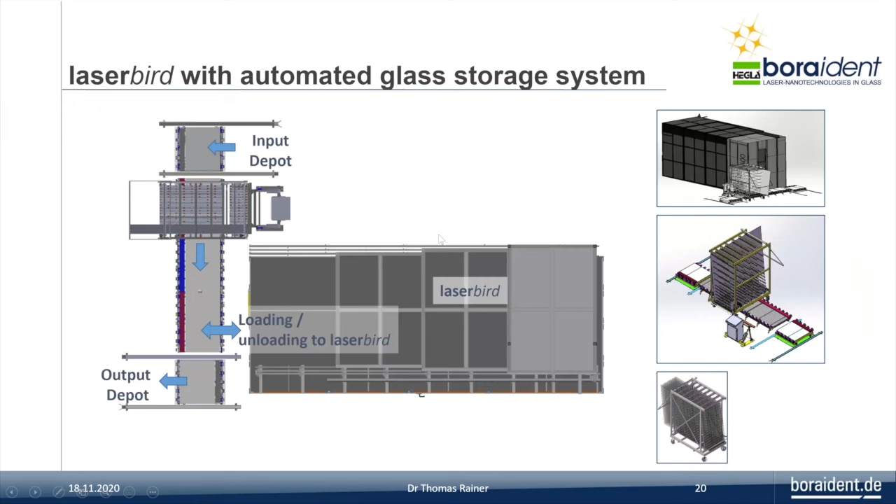In terms of technology, we have the machine with the loading and unloading area, the device, the safety chamber, climate device, and exhaust device for removal of coating with different material flows. If you have a lot of panes to structurize, we have automatic loading with a hard break system.

Before we can pattern, it's possible to create a layout for the machine. In most cases, the layout comes from the architect, and with preparation work software, we can transfer this layout with a few clicks to a machine-readable layout. The first three stages are in the office, and of course the laserbird stands on the shop floor and processes the glass itself.

So I've shown you a lot of possibilities we can do, and I'm sure in the future we'll have possibilities to make new things. I will summarize my lecture with a small movie you can see here.

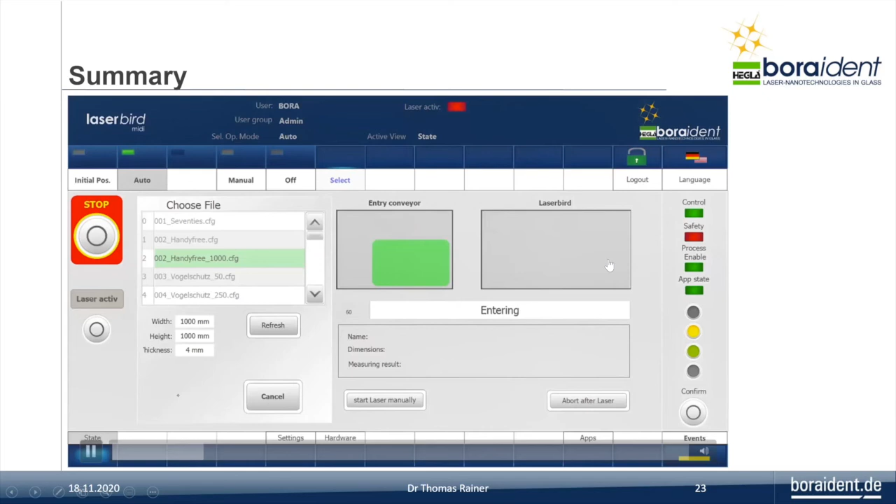Here's a bit of insight into the laserbird. You see here the HMI of the laserbird, used to choose the application. Put a glass pane on the entry conveyor, it goes inside the laser chamber, and then we have the patterning process step by step.

Here you can see the patterning process. This is the glass pane itself, and on the blue line, the laser is working on this pattern. After it's finished, the glass automatically goes out of the system.

You can see here the glass pane goes inside the chamber, and then we have a look inside this chamber. We see the laser working, and here is the laser head. In this setup, we have one laser on the structuring head. The empty holes here show the possibility to add the same laser twice, or different lasers, to do different things. Now the laser is working.

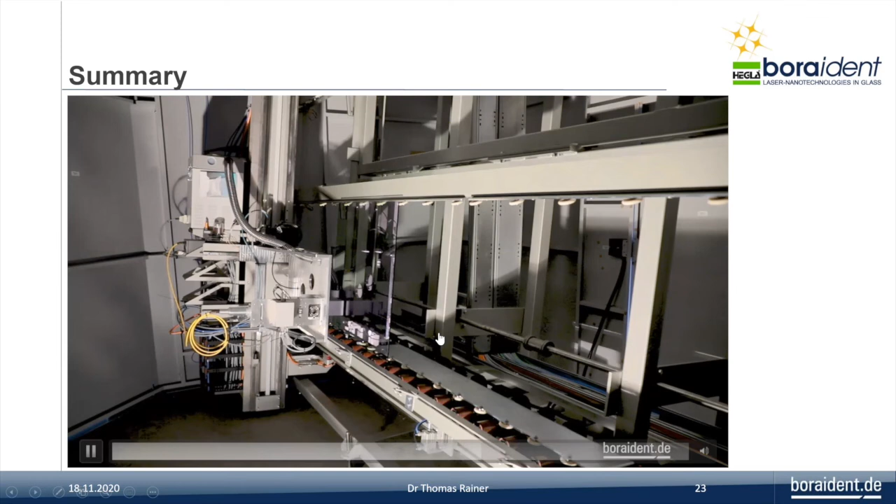In this case, we structurize a bird-friendly structure in the coating, in the pyrolytic coating of a glass pane. It's very hard to see, but if we go a little closer, we see the points that prevent birds from hitting the glass surface. So we can make clear markings, bird-friendly glass, cell-phone-friendly glass, and avoid collisions in the air.

And at the final end, if we bring material to the glass surface itself, we can create antibacterial functions inside the glass surface itself.

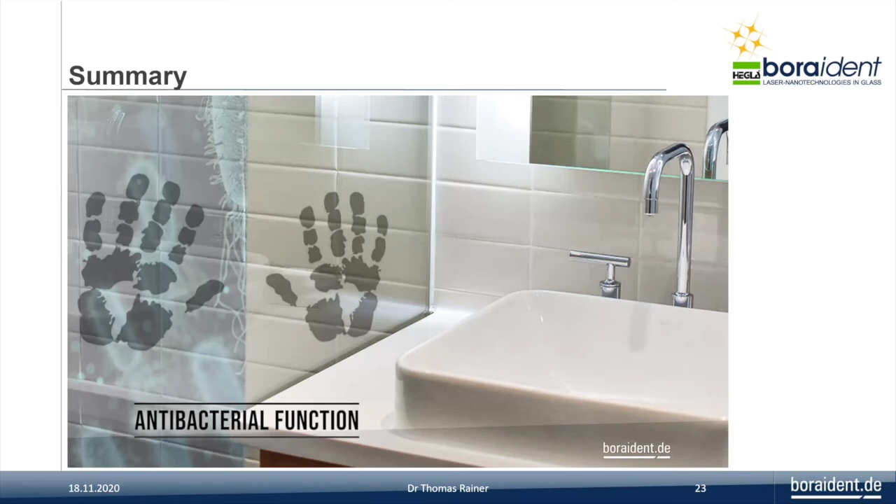This is all I have to say about laser functionalization of glass. If you have any questions, don't hesitate to ask us, write an email and get in contact with us. Thanks for your interest in our webinar, and you are welcome to ask things. Thank you.